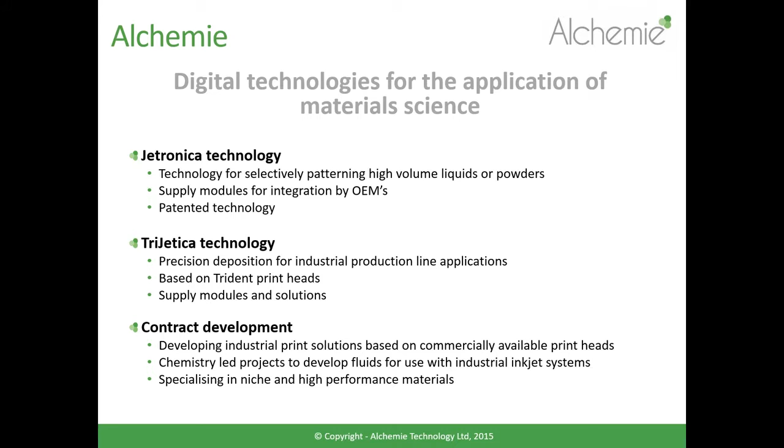So I'd like to first talk about this suite of technologies that we have called Jetronica, and it's all about digital deposition of liquids and powders. I'd like to talk about the liquid technology first, and then highlight some of the powders. And the industrial applications that we're focused on are really all about selectively patterning protective coatings, applying coatings on production lines, dispensing adhesives, putting inline pre-treatment inkjet systems for textiles and labels and all sorts of applications. We're also interested in applying functional coatings, so 3D applications where we're directly applying metal powders such as titanium and tantalum.

Biodispensing of medical devices, so we're doing a lot of work dispensing drugs to create either a very customized, specific dosage for a patient of a 3D printed pill, or an implantable drug that gets put into the body to release the drug over a well-defined period of time. And much of this functional coating and material science application is being carried out with Manchester University.

We're also now routinely printing graphene and maintaining the properties of graphene. For those that are aware of the last 10 years of development of graphene, what's really difficult is to be able to process graphene to produce the properties of graphene without it reverting back into graphite. And we've developed some ways, and our technology is now capable of printing graphene and maintaining the properties of graphene. So this is quite a disruptive approach to many things.

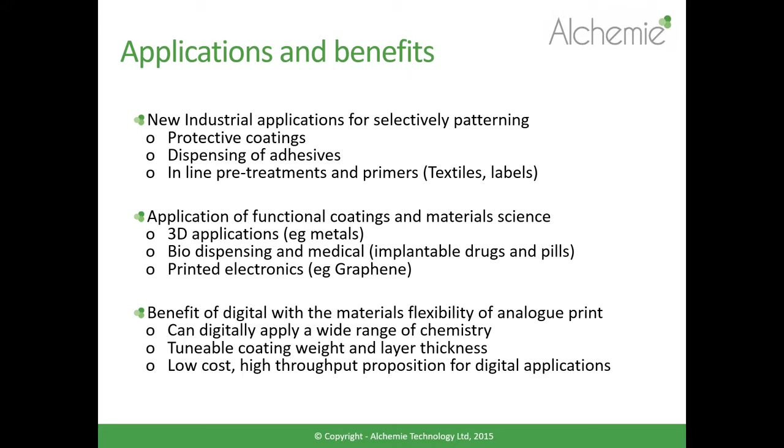So it's very robust. It's all stainless steel with the piezo crystal, refurbishable, very fast returns on investment, extremely high liquid flow, and a drop volume range from nanoliters up to microliters, as opposed to being constrained to picoliters with traditional inkjet.

So the difference in this is really all about being able to jet higher viscosity fluids, 200, 500 centipoise, so 20 or 50 times greater than traditional inkjet, and volumes rather than in the picoliter range, in the nanoliter and up to a microliter range. And that gives you tremendous flexibility in terms of production line applications.

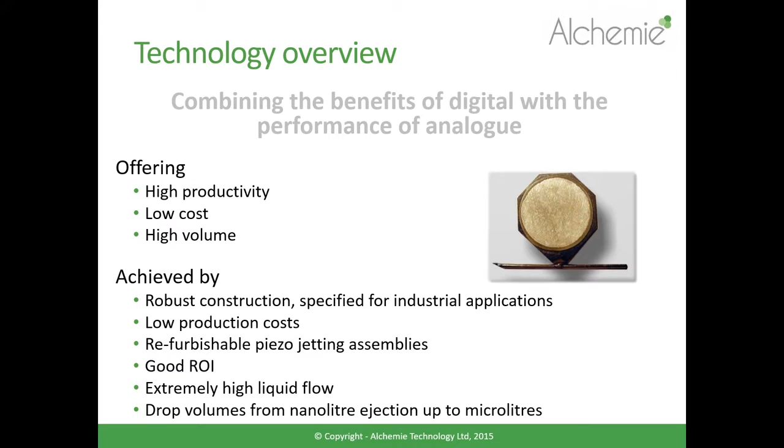So this jetting assembly is based on a piezo needle construction. It's simply a stainless steel capillary tube that has a tip that looks like a hypodermic needle, and a piezo crystal is micro welded to this tube, and the dimensions and the angles and everything associated with the configuration is important to be able to generate a standing wave when the piezo is activated, which travels through the fluid,

and at the tip, the arrangement is such that we get this massive amplification, and as the meniscus is disturbed, this tip vibrates. So it's different again from traditional piezo drop on demand, in the sense that this tip, this nozzle, actually vibrates and is displaced about 10 microns.

So as we excite the tip, it moves up. It disturbs the meniscus, liquid flows onto the outer surface of this tip, and on the downward movement, it flicks droplets onto the substrate. And it can flick droplets over large throw distances, because the volume of these droplets is so high in comparison with traditional piezo.

Traditional piezo is all about trying to throw feathers through this high resistance of air. These are more like cannonballs being ejected from this tip, and so we're able to jet them over many centimeters, as opposed to millimeters in terms of throw distance, without losing any properties. So we can do this at quite high speed, up to 2 meters a second, and we can vary the drop volume

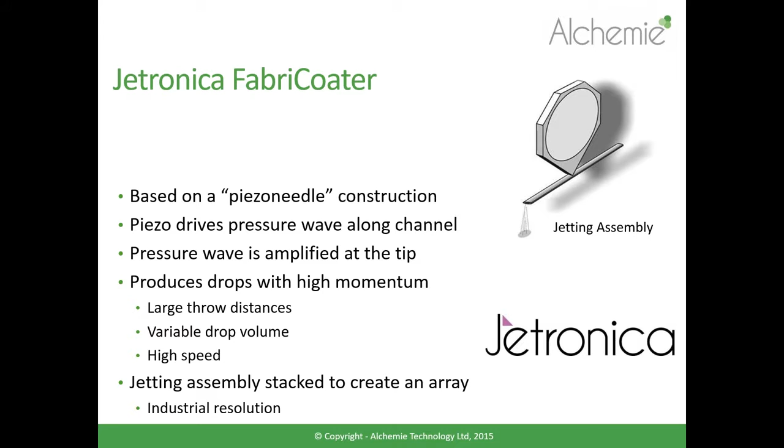And just to complete the operation, we apply the standing wave, and then because of the tip, we get this massive displacement at the tip, and also a massive reduction in the vibrating mass, and that gives this ability to overcome the threshold of firing these droplets from the tip of the nozzle.

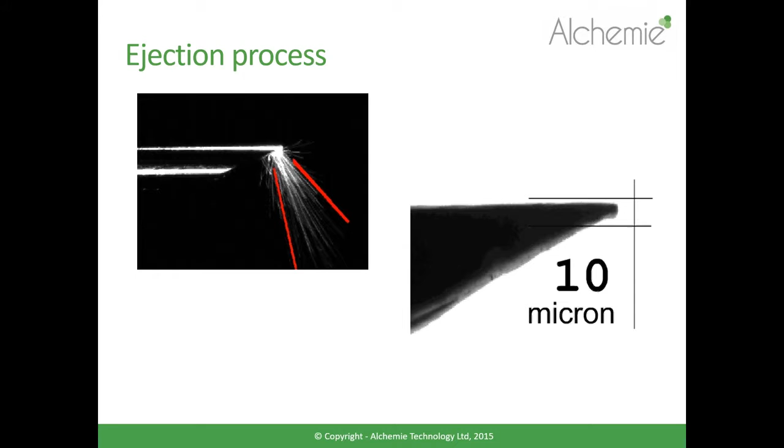And we can vary the number of droplets by simply changing the excitation time. So the longer the excitation time, the more droplets we can produce in one cycle. So one thing to point out, this technology is not suitable for graphic applications. It's really suitable for selectively patterning rather than high-resolution graphics. So if you're interested in high-resolution graphics, this is not a solution for it.

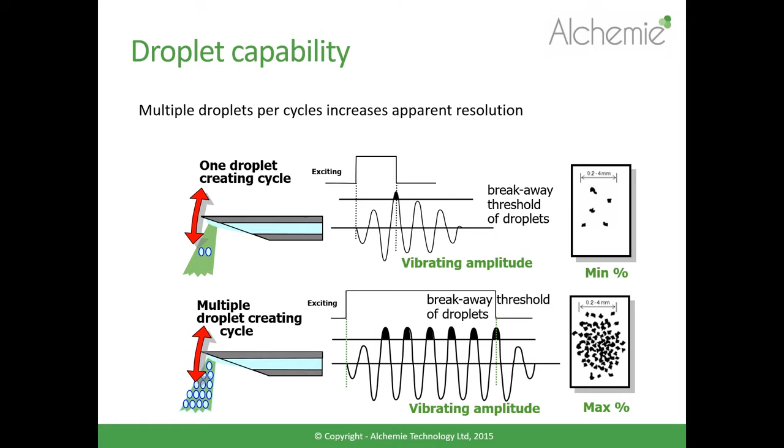So we can jet a wide range of fluids, similar to analog fluids, up to about 500 centipoise, a whole range of different materials. Particle size suddenly doesn't become that big a problem, and so pigment dispersions with 10, 20, and even up to 50 micron particles can be jetted using this technology. And we can use a wide range of viscosities and control volume. And because it's all stainless steel, it's inert to a whole range of chemistries.

So we're focused on adhesives, industrial product coatings, textile pre-treatments, textile coating, textile dyeing, a lot of biofluid deposition, and then there's a whole range of additive manufacturing applications and selective powder coating applications.

And we supply a range of modules from jetting arrays, where we've developed our own onboard electronics. It's taken time, our own ink systems, and all of this is relatively more straightforward and simpler than inkjet. So inkjet is highly sensitive. You have to worry a huge amount about the details. This is a lot simpler than inkjet.

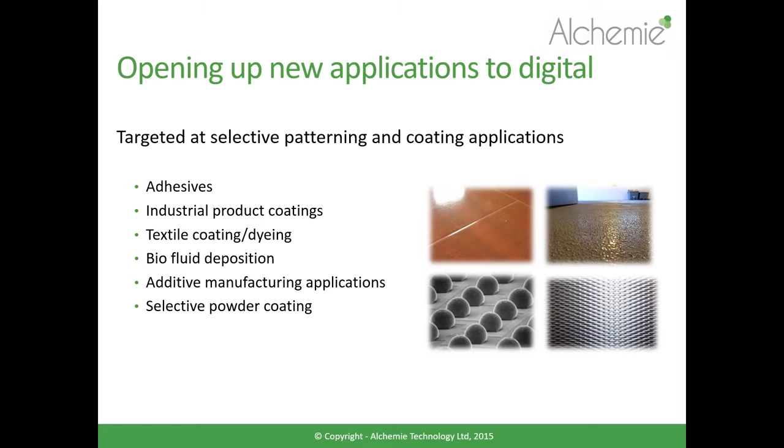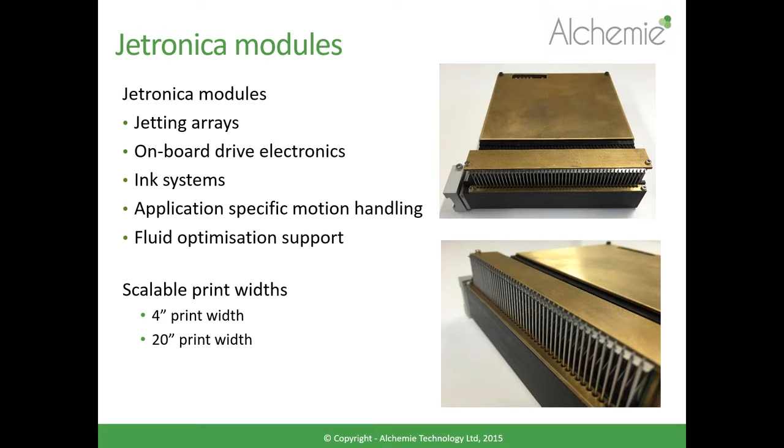And then you go to the, and you change a few printing configurations, drive voltage, and other things, still without changing any chemistry, and you can start to control this optimization and control the performance much more effectively. And then if you want to optimize it a bit more, then you can start to tune the viscosity and the surface tension to the drive voltage and things like that. So a relatively simple process.

So as an inkjet person, it's quite difficult to come and use the word simple in any development process, but we're hoping that this will be a simple development process for a lot of different applications. And we've put some evaluation systems together, and this is just a selection of simple depositing, one nozzle depositing to 4-inch bars, and even 20-inch bars together, so that these can be evaluated very quickly. So that's liquid inkjet,

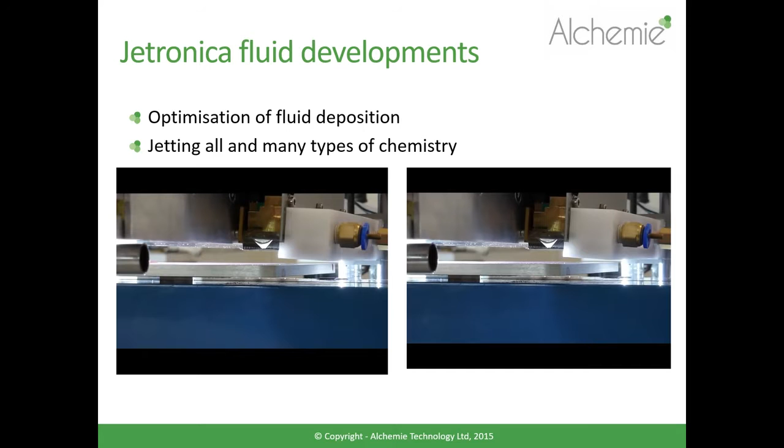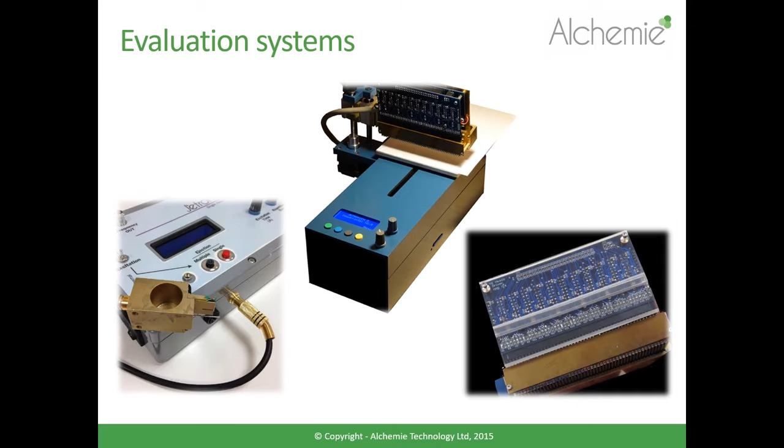Jetronica technology. I'd like to just describe some things, and this is the first time we've sort of gone public on this. So I'd like to describe some of our activities that we've been pursuing on Powderjet, dispensing powders using a digital process. And we have a number of different techniques, and I'm not going to describe all of these techniques, but you choose a technique depending on what sort of properties you want. If you're interested in vertical height, then we have a technique for that. If you're interested in very strong covalent bonding to get powders that stick together very firmly before they're fused, then we have a technology for that.

If you want very high resolution, an inkjet resolution, we also have a powder technology that's capable of delivering very high resolution digital powder prints, except the particle size is clearly going to determine how high resolution you can achieve. So in all of these powder jet technologies, we're not really restricted by particle size. And we can go from micron up to several hundred micron particles. And the whole point is to take the complexity of the chemistry away.

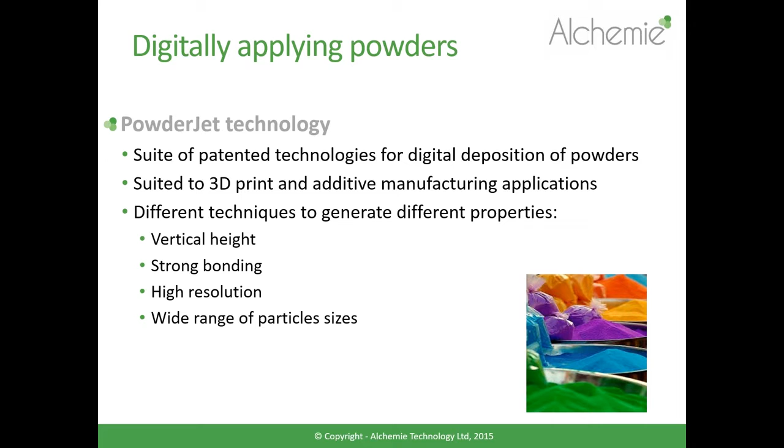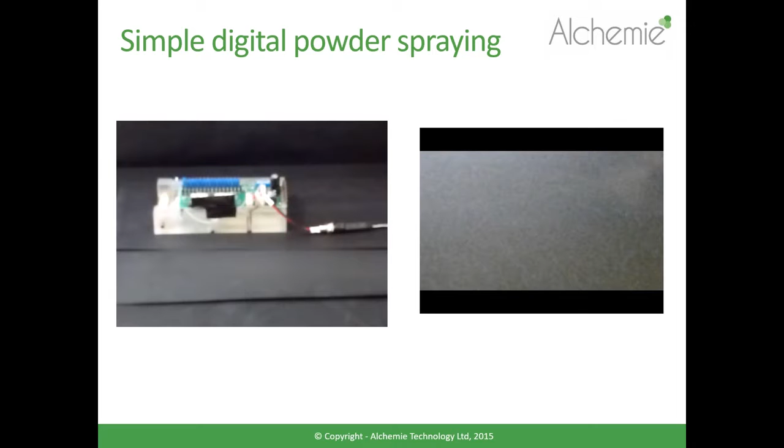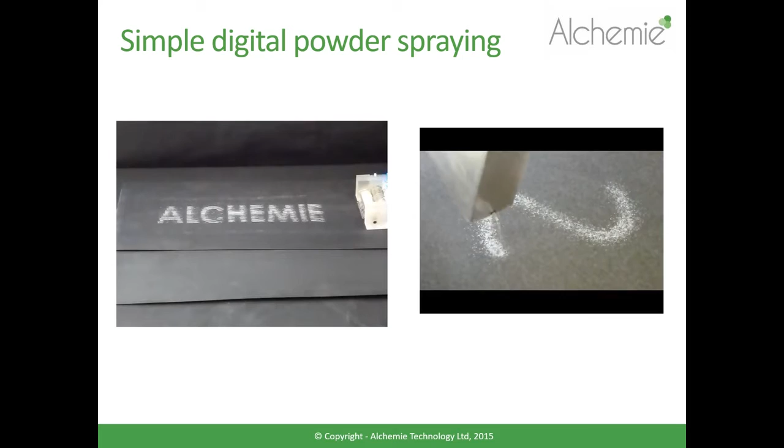Here is just a very simple, very crude video of a nozzle that's several centimeters away dispensing glitter. And this glitter is a very irregular shaped 400 micron particle size just being sprayed onto a surface from a single nozzle. And then if we look at typical commercially, so on the left we just got commercial grade titanium dioxide just digitally being applied. It clearly requires a fusing or a fixing technique after, but to show you it's a powder. And titanium dioxide, that's just powder being digitally dispensed.

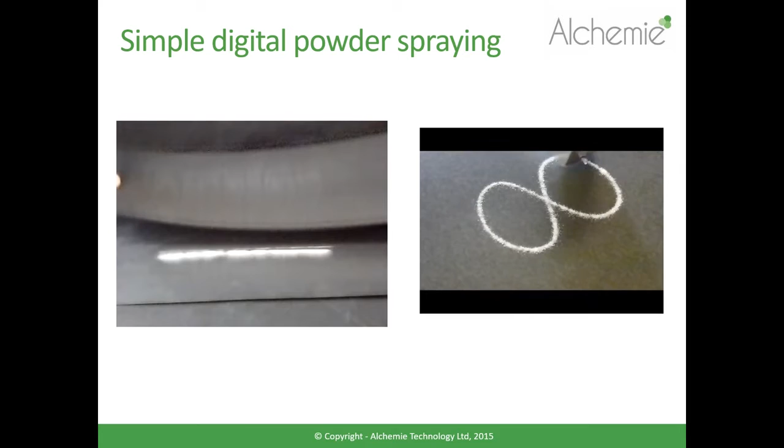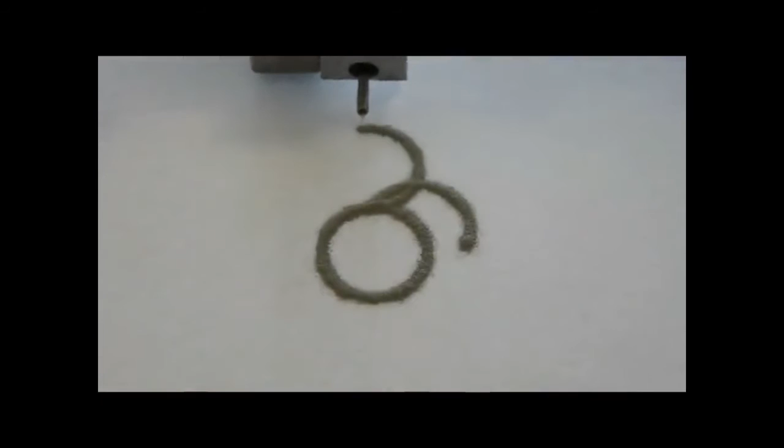If this right-hand video hurries up a little bit, which it won't, of course, it can show that if you reduce the height of the nozzle from several centimeters to about a centimeter, then the resolution or the fine line of this very difficult glitter type material creates a much finer line. So you get the message of this sort of conical effect that's generated. So the nozzle there is about 500 microns to give you about a scale of how wide these lines are.

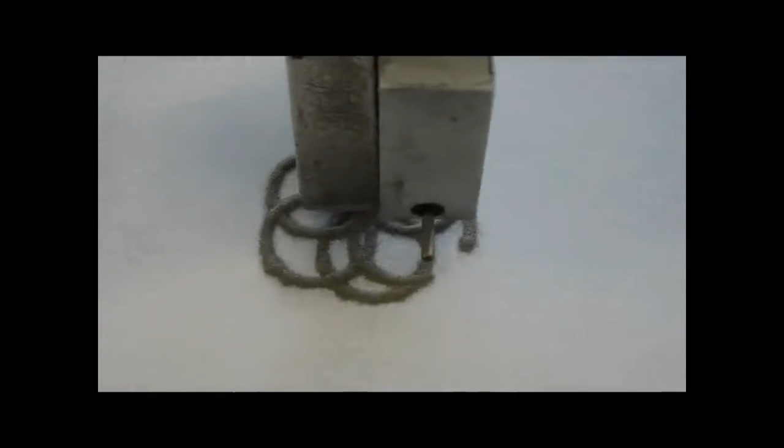And then if we move to 100 micron titanium powders. So this is just pure titanium powder being jetted using this technique. Again, that nozzle is about 500 microns, and you can see the amount of material that is being deposited, and you can see the sort of 3D profile that's being generated using this technique. And again, this is just regular, commercially available, off-the-shelf titanium metal powder, and we've repeated it using tantalum and other metals as well. That's a technology, digitally applying powder.

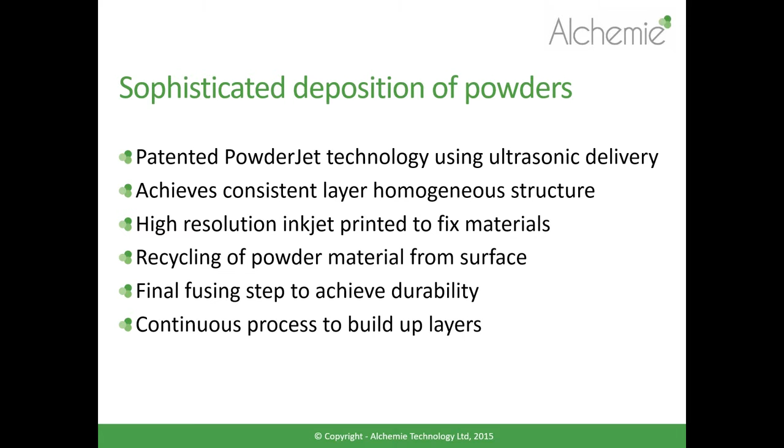We also have another way of digitally applying powder using ultrasonics. And what this does is you apply a very loose layer of powder onto a surface without any digital, just a simple layer of powder onto a surface. And it's all very loosely held, and that's critical. And then we come along with an inkjet print head, a very high-resolution inkjet print head, and it can even just fire water. It doesn't have to have any fixing agents or anything else, and this water goes directly through this loose structure and actually causes these particles to agglomerate and bond onto the surface very effectively to produce a very high resolution image.

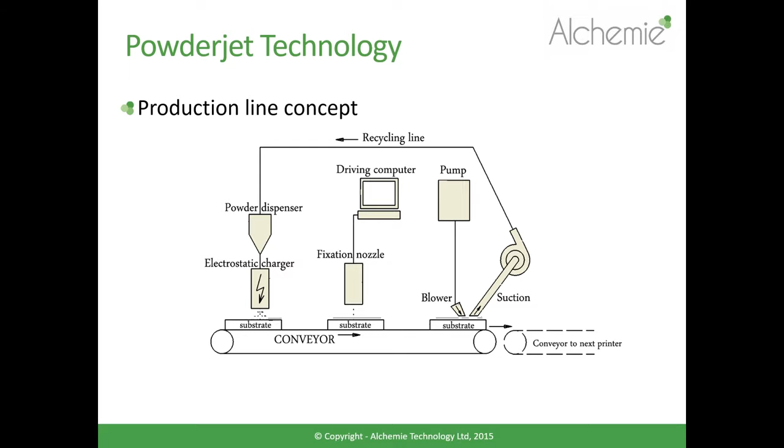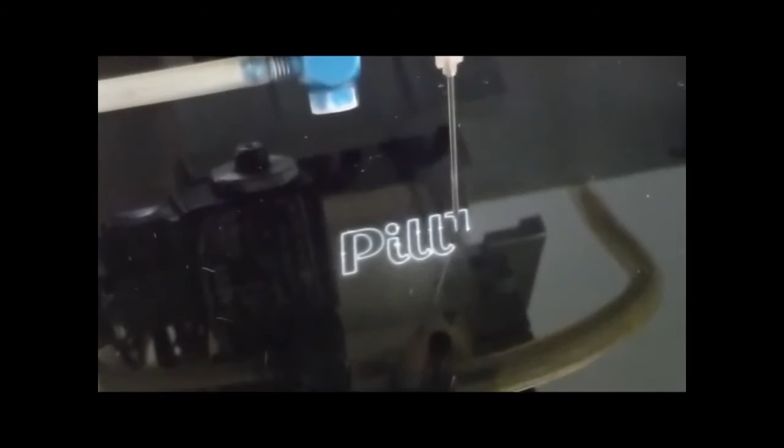And then after we remove the powder, we can fix it to get permanent durability if that's required. So this is an illustration of what I just said. Ultrasonic dispensing of a powder, creating a loose structure. The high-resolution inkjet print head fires a drop through this powder to fix it onto the substrate. You blow the powder that's not been fixed away, and you have a very high-resolution image using particles that would be very difficult to inkjet any other way.

Here is another technique, a powder technique that we're using as the basis to print pills, customizing it to be very patient specific. This is an inert material, but it gives you the impression of the type of effect that we can generate. And using that technique, printing simply onto a ceramic tile in this case, you can see that we've put layer upon layer and expanding it. You can see the type of vertical heights and the vertical layers that we can produce.

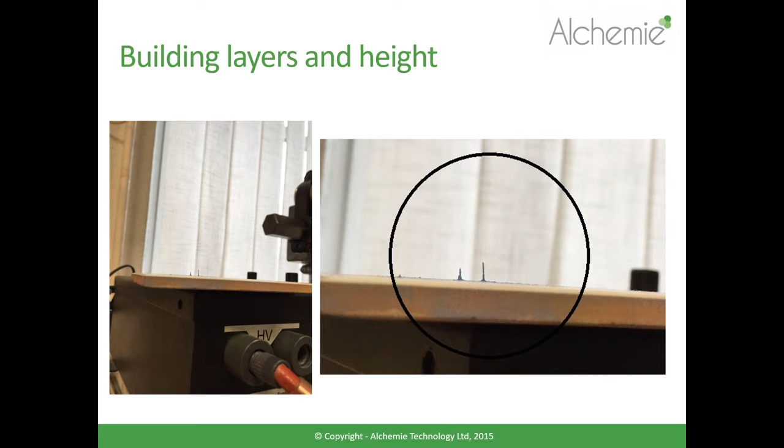None of this has been fused. This is just printing a layer upon a layer to build this structure in height. If you turn this upside down, it would just stay as it is. If you hit it with a hammer, it would break. You would have to fuse it to get that sort of mechanical strength. But as far as building complex 3D structures, there is enough robustness and strength in these vertical layers to be able to do that. And of course, you get rid of all of these problems of 3D printing, of having stress in between the layers, if you're able to print the whole three-dimensional structure in this way. So building layers in height is something that we're interested in doing.

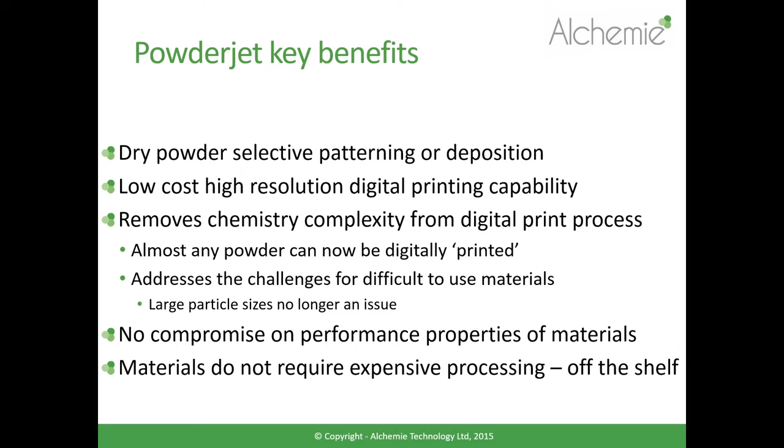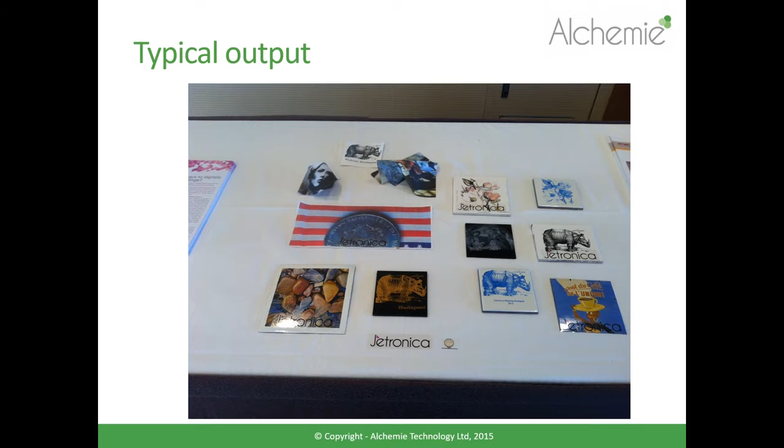So some of the benefits of also considering digitally printing powders as well as liquids is we have the ability to selectively pattern. We can do this at very low cost, high resolution with a digital printing capability. We totally remove all of the problems and complexities of the chemistry from this digital print process that have hindered and prevented progress over many years. And we've reached a stage where we can pretty much jet any powder using one of these three techniques, and larger particle size no longer becomes an issue in terms of being able to jet the material. So we're no longer compromising the performance of these properties, and generally we see that you can use off-the-shelf materials to do this.

And these are some print samples of liquid and powder samples being jetted. It's just some typical samples. It's not focused at graphical images, as I mentioned, but I can't persuade anybody not to produce a graphical image to demonstrate the capability.

So where are we going with some of these things? Well, we're very much going down the route of creating customized pill printing. We're very much going down the route of creating implantable drugs. The whole medical industry is looking for taking the control of the patient out of the treatment. So if you can imagine an onion structure on a millimeter scale, and in between each of those layers of the onion you're able to put a dosage of a drug, then you can implant this device. And if you've customized it to the pH of the stomach and the pKa rate of the patient, then you're able to very accurately dose the amount of drug over a long period of time, say a month or 6 weeks. So there's a lot of interest for very nasty, difficult diseases like pancreatic cancer and bowel cancer to develop techniques like this.

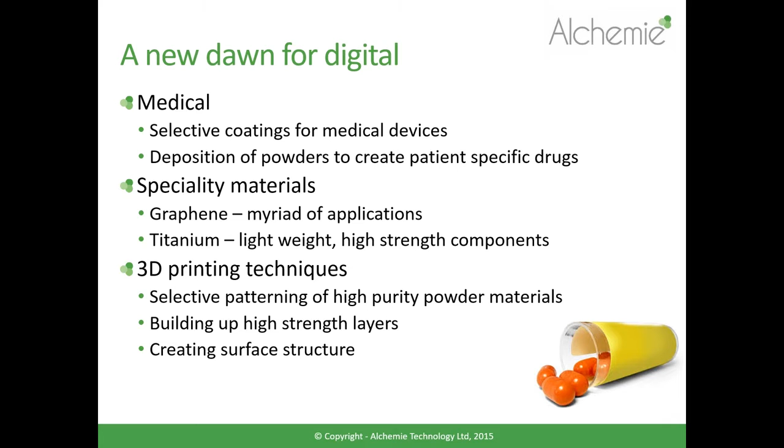Specialty materials: we certainly see there's a huge future now in being able to print graphene for a whole range of applications. The thinnest material in the world, a third of a nanometer. The stiffest material in the world. The most highly conductive material in the world. A very high conductor of heat. And with 97% transparency if it's contained as graphene and not graphite. Titanium and other metals to produce very lightweight, high-strength components for a lot of 3D printing applications. So that's the technologies that we're developing.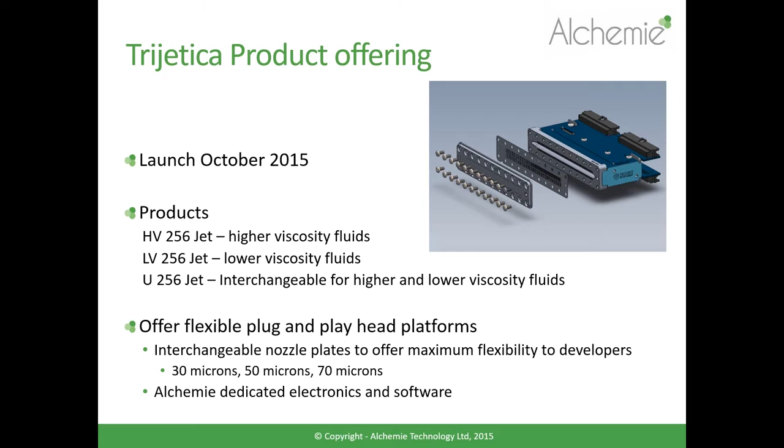We've just finished that exercise, and we're basically trying to make it as simple as possible. A 256-jet Trident print head for higher viscosity fluids, a low viscosity version, and a universal version for high and lower viscosity. And of course, Trident's a fantastic industrial print head for evaluating an industrial application, because you can take the thing apart and put it back together many hundreds of times.

So you don't need to worry about blocked nozzles so much, and we can change nozzle diameter so that you can tune your drop volume to the chemistry in an appropriate way. And now I'm pleased to say that we have our own dedicated electronics and software to support it. And just to put things in perspective, this is the way in which we see things and how we differentiate from traditional graphics inkjet print heads.

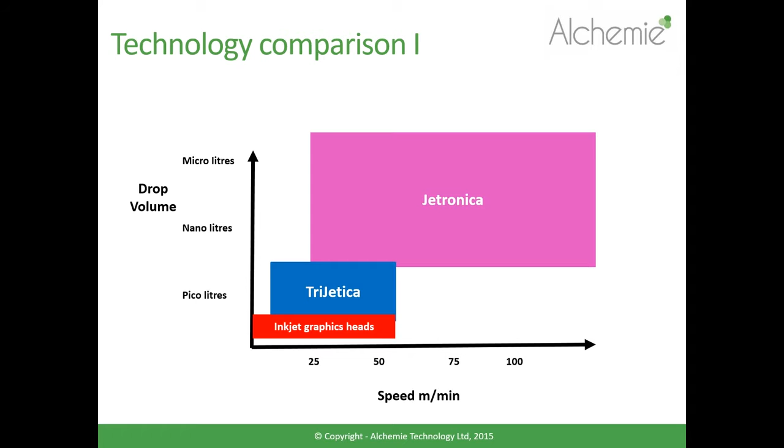So the traditional piezo drop-on-demand inkjet graphics heads are highly sophisticated, fantastic print heads for what they do, and they've really been focused for many years on picoliters and these sort of speeds, and it's a domain that they dominate in, and we have no interest in going there. And so Trijetica is a bridge to our Jetronica technologies that we're developing, and our Jetronica technologies enable us to go to much higher speeds and much higher drop volumes, and that's the relative difference in these propositions.

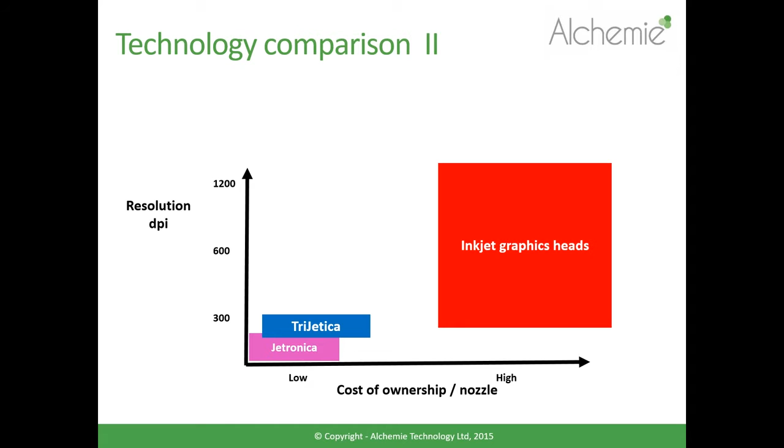Excuse me. And similarly, if you plotted resolution versus cost of ownership, then resolution doesn't come cheap. These graphics heads have tremendous resolution, dots per inch, but that costs a lot of money. We're at much lower resolutions, but remember, much higher drop volumes, and the cost of ownership is significantly different, many times different. And the same goes for the Trident-based printhead. The cost of ownership of a Trident-based printhead over its lifetime is one of the lowest of any inkjet printhead there is on the market.

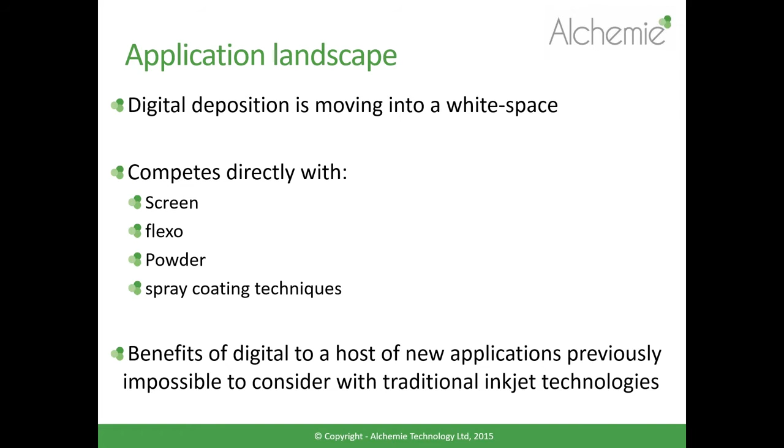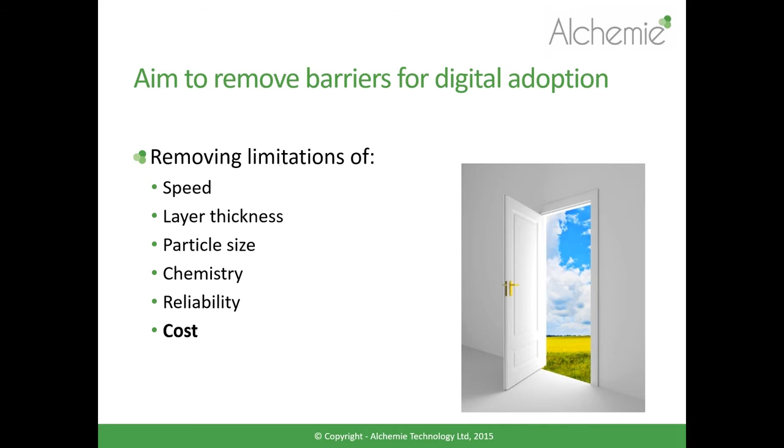We wanted to find a relatively simple digital technology that was capable of competing directly with screen, flexo, powder, and spray coating applications, because we see there's a huge amount of interest for a lot of applications in this area. And what our aim is, is to remove all of these limitations, and that is speed, layer thickness, particle size, the complexities associated with the chemistry, making things simpler and therefore more reliable, but above all, make the cost proposition more akin to an industrial process, rather than a very high technology proposition in an industrial environment.

So finally, just leaving you with some thoughts. There's no doubt that inkjet is trending away from its graphics heritage. It's done fantastically, and it is doing fantastically well, printing graphics and images. But there is definitely a trend towards truly industrial solutions for additive manufacturing. And this is evident by Xaar, Kyocera, and even more recently Toshiba TEC announcing that they're supplying print heads with larger drop volume. But we think we're many factors higher in terms of drop volume for a lot of these industrial applications.

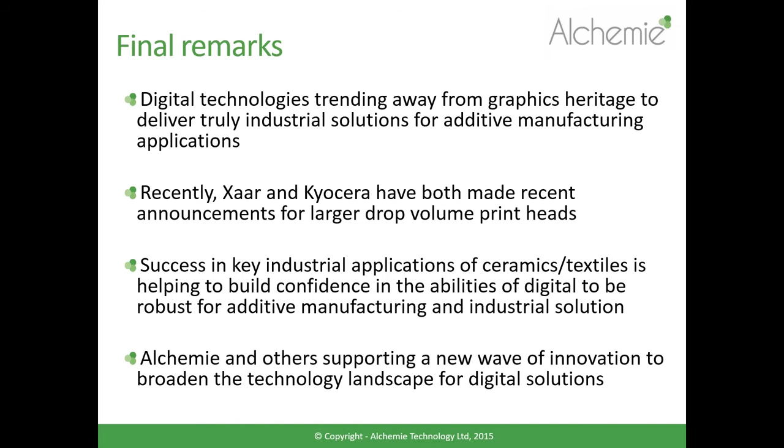And I think the confidence in taking various inkjet technologies into industrial applications has really been boosted by the success inkjet has enjoyed in printing ceramic tiles, and the success it is beginning to enjoy in printing onto textiles. So the timing is good as far as exploiting many of these industrial applications. And certainly, not alone and with others, we're trying to push digital printing into many of these core industrial applications. So thank you very much.